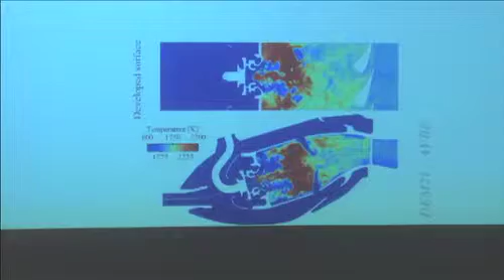One of the simple reasons that you can understand right now is that if the wall is cold, which is normally what it should be, remember we have the exponential minus Ta over T in almost all reaction rates. So at the wall, the flame cannot burn, normally. So that means that you have to think of this interaction as going both ways.

Now, right away, if I tell you that combustion stops at walls, you see that the hydrocarbons, which are able to hide themselves close to the walls or even in crevices, they won't react. They're going to be able to be in a chamber and avoid burning. So these guys, after that, are going to pollute when you release them to the atmosphere.

So there is a link also between the presence of the walls and the presence of the pollutants. In the piston engines, for example, we know that the crevices between the cylinder and the piston are actually a source of pollution, which is quite important.

Now, another thing that walls are doing, and I will show that in a minute, is that walls are actually also acting on the acoustics of the system. If you have a flat wall, an acoustic wave arriving on this wall, it's not the same thing as having a flat wall with holes, because there the acoustic waves are actually going to be damped by the wall, and it's something we use.

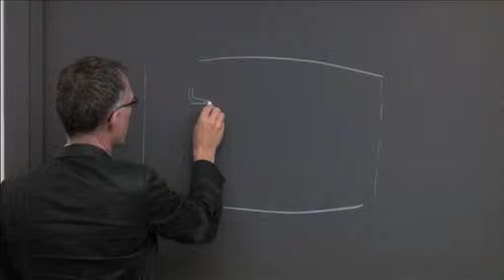For example, in afterburners. Afterburners, you know, are used in fighters, aircraft, to provide more power. So here you have the engine, and here what you do, you inject a lot of kerosene. Again, it's a pretty stupid way to waste kerosene, but you do it.

And here you have flame holders. And so you have an additional flame here, and this is what produces these nice pictures you've all seen. You get a big flame coming out of the engine.

And if you don't put here liners, which are walls with holes, like this one, they are put on the walls here. When this thing gets crazy, again, it has a thermoacoustic wave oscillation, and the way you damp it is by putting walls with holes there. And you can show that it's a classical, again, classical course in acoustics. They act as damping for the acoustic waves.

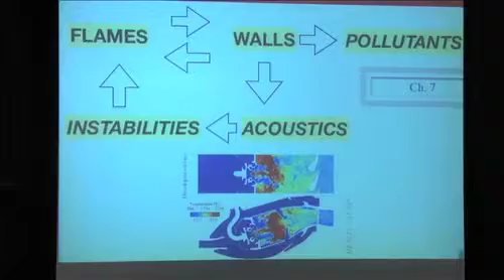So altogether, it means that the walls, again, if you're doing an academic study, you don't care about them. If you want to talk about a real flame, you have to care about walls. So I'm going to be talking about the walls of a combustion chamber, but not only in gas turbines. What I'm going to show today is actually applicable to most chambers.

Okay, if you talk to people in industry, they'll tell you that if you have a combustion chamber, you must burn all the fuel. That's the minimum you can do. You must not pollute too much, and you must not burn walls.

So burning all the fuel is easy normally. You just make the chamber longer. At the end of the day, you will burn everything. Okay, that's simple. Doing that without too much pollution is difficult, but doing all three is something, of course, you cannot avoid.

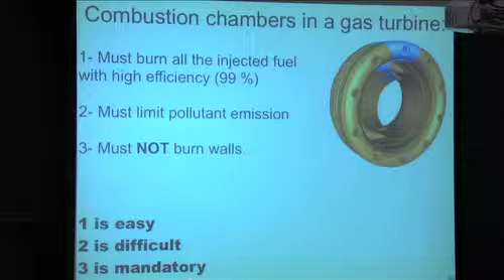Okay, if the chamber burns, it can go anywhere, and you don't want to have this kind of problems or this kind of problems. Every time here, of course, you realize that if you have a 2500K flame touching a wall, it's the end of the day for it.

So which walls are we really talking about? In a combustion chamber, you have a lot of walls. You have first the plenum walls here. Those walls are cooled. They're cold because the air coming in here is cold.

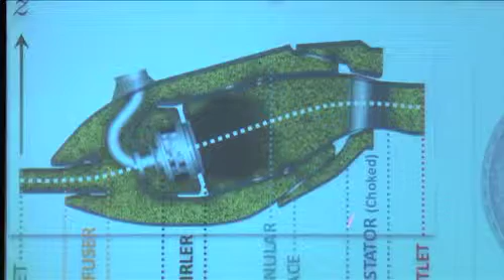Those walls here really see the flame, so they have a hard time. And there's a second type of wall, which is the wall of the high pressure stator, because those walls are facing the hot flow coming directly from the engine.

So in an engine, you basically have two types of cooling problems. You have people who have to care about the turbine, the first stage being the most critical one, the one you need to cool. And then you have people who have to take care of the walls of the combustion chamber itself. Those are not the same technologies.

The first thing you do to protect these vanes is to inject cooling gases. As I said during the introduction, all the question is to be able to mix them fast enough so that when you reach this wall, you have something which is reasonably warm or cold to avoid having problems here.

On these walls here, those are very close to the hot zone, and you cannot do much to help those guys. So what do you do here? You have to use other technologies, and I will show you how this is done.

Typically, the design of all the cooling system in an engine is probably the most important thing that you can have in practice when you design a chamber.

Let me say that during this talk, I will consider that the walls do not burn, should not burn. There are cases where this happens. Normally, if you cool the wall, it should remain cold. If it remains cold, it's not going to burn.

To predict that, it means we are not going to compute only the flow, we're going to also have to compute the temperatures within the wall. So if I take my CFD hat now, as soon as you talk about wall, it's not only CFD for the flow, it's also going to be a computation for the wall temperature.

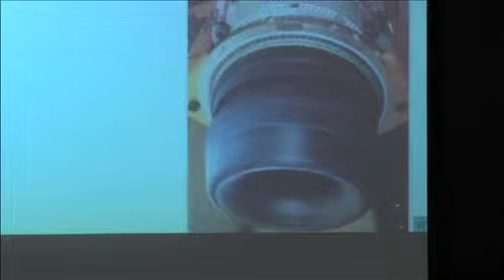If the wall cannot remain cold, the wall is going to burn, and then it's going to die after a certain time. But you do that on purpose on certain engines. For example, rocket engines with carbon-carbon technology, the nozzle is designed so that it burns time after time, and at the end of the propulsion phase, you have lost a lot of mass.

This is not what I want to study here, okay? This is a different problem. Normally our walls should not burn. So what do you do for these walls here? Well, you have to do something.

The thing which is done in most cases is what we call effusion. What is effusion? It's the fact that you're going to drill some small holes here, and through these holes you're going to have some air flowing into the chamber, and this air is protecting the walls.

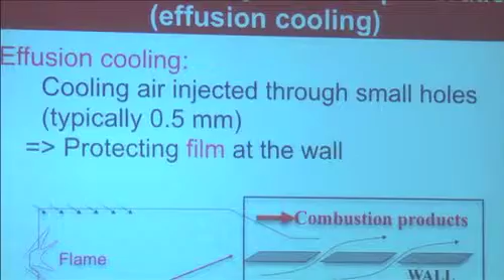Now, you shouldn't say that, but you realize that in an aircraft, when you're flying, your life depends only on a few millimeters of air flowing on the wall. Because if this small film of air goes away, you're dead, okay?

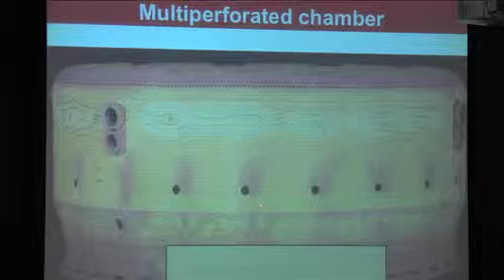The way these holes are drilled really belongs to the secret technology of each manufacturer. This is an example of a Turbomeca engine. You see these holes here, each of them. Today when we do CFD, we are meshing each of them. To give you an idea, there are about 9,000 holes in a chamber like this.

And the angle of the holes, the direction of the holes, and the shape of the holes makes a big difference. For example, Turbomeca a few years ago changed its technology to drill the hole. You don't do it by hand, okay? You have a sophisticated system to do that.

A hole looks like this, but because of the way you build it, you use different technology. One of them is such that at the end you end up with a hole which is like that, with small modifications. So they changed technology a few years ago, and instead of having that, they had a better technology. Better means they had it straight here.

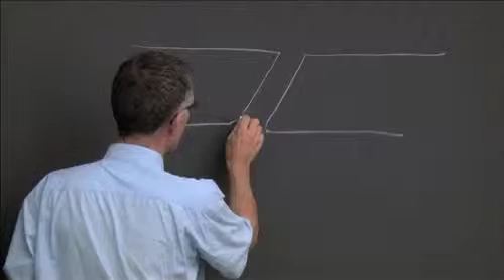Well, the engine did not work. It was burning right away. Because when you do a small change here, as you're going to see in the first simulation, the flow in the hole changes, and it's something else.

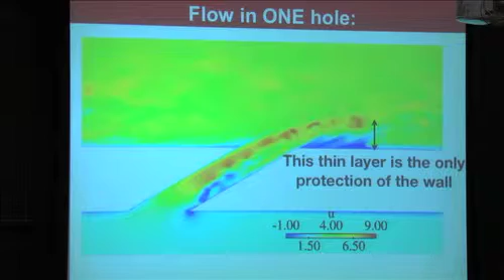Remember, this is the velocity field. If I would show temperature, you would see that this leads to a small film here, and the thickness of this film is what protects the wall. Again, if this film goes away, you're dead. The engine goes away. It always struck me when I saw that - this is sensitive technology. Just a small mistake in the holes, and then you lose the engine.

It's about the same idea for the high-pressure stator, but the holes are not located at the same place. You put the holes where you think you're going to have problems. For the high-pressure stator, you need to compute the temperature in the blades, and I will come back to that in a few minutes.

So it's not only a fluid mechanics problem, as I said. You need to compute also the heat transfer within the blade to know exactly where the hot points are going to be. And as I said, there's a coupling with acoustics, which I will not discuss today - that would be a couple more hours to describe.

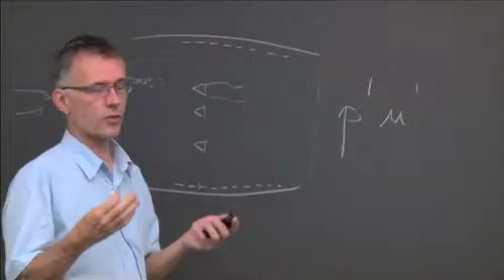How these things act on combustion instabilities - everything I've said yesterday about instabilities, you would have to revise if the walls were multi-perforated, because it would add damping. You remember this term I described yesterday, P prime U prime, as the loss of acoustic energy? I was saying if you have a smooth wall, flat, without holes, U prime is 0. But if you have a wall with holes, this term will not be 0, and you have to redo everything. So I'm not going to do that today.

I'm going to talk about flame wall interaction, give you some general ideas, talk about examples of coupled LES plus heat transfer simulations that we start doing now. It's really recent stuff here.

And then I will also show you an example where wall temperatures are actually changing flames also. It's an ignored factor in many experimental devices - people don't really care about the temperature of the walls, especially when the flame is stabilized. But that's a mistake. We need to care about the temperature very close to the flame holders. And I will not talk about multi-perforated cases because, again, smooth walls are enough to begin for today.

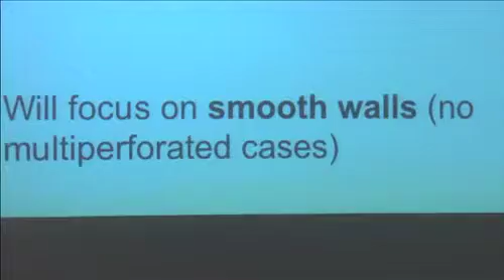So let me start with general features of flame wall interaction. You can have 3 types of events. If you are sitting on a wall in a combustion chamber, you can see different things happening to you. The first thing is that if you're lucky, you are just feeling non-reacting gases which are cold, so that's fine - you have a small heat flux.

Then suddenly you can be surrounded by burnt gases, and that's going to increase the fluxes. But it can be worse than being in burnt gases - you can be touched by a flame front which just burns in front of you. So the flame arrives on you, and that's going to generate the highest flux here.

Typically, to give you a picture, that's what you have in the backward-facing step flow. If you have a flux detector here, either you are in phase 1 where you just have fresh gases in front of you, and that's cool, no problem, or you are in phase 2 where you are in the burnt gases, or you are in phase 3, which is when you are just hit by the flame front. That's the moment where you're going to have very large heat fluxes - when I mean large, I'm talking about megawatts per square meter.

It's not going to last long, but it's going to be hot. You know that the time you remain in the flame is essential. If someone has a candle here, you know you can do that - you cannot stay. If you have a high flux on your finger for a short time, it's okay. If you keep your finger on the candle, of course it's not going to work. So same problem here - it's going to be a problem of heat flux and how long it lasts.

Head-on quenching is the simple case I described before, except I didn't talk about the flux. You take a wall, put premix gases in front of it, ignite it, the flame moves and hits the wall. You can measure the heat flux here, and this is a classical experiment found in many places. People doing piston engines have studied this problem for a long time. This is 1D, so you can do it rather simply.

Then you can have what we call sidewall quenching. The flame is propagating in this direction, and you have a wall here. So I will define the wall distance, which is always the distance between the wall and the flame front. Here it's this distance, and here it will be this distance.

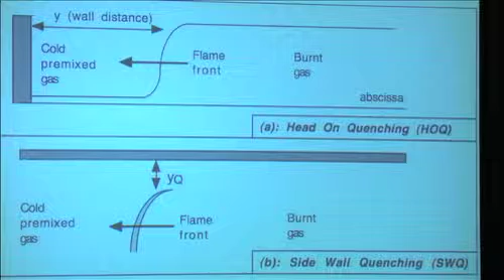If Moshe would be here, I would tell you that you can write theory for that, and that's true. You have a propagating flame with the standard profiles for fuel going down, temperature going this way, heat release going that way. When you go closer to the wall, closer to the moment where the interaction takes place, at some point the flame starts sensing that something is wrong in front of it.

Someone's cold there. So the flame says, well, if something's cold, I may have to decrease my reaction rate, and the flame also sees that there is less fuel left now.

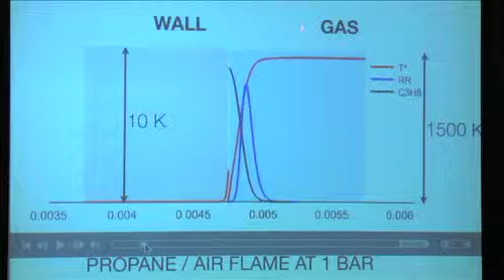When the flame comes here, you see the reaction rate starts decreasing, there is less fuel to burn, and then at that point the flame enters a zone which is cold, and because it's cold, there's no way to burn anything now. So there's quenching, the flame dies.

After the flame is dead, you still have, as I said, unburned fuel here. This unburned fuel is not going to stay here indefinitely. It's going to diffuse very slowly, but it's not burning anymore. And of course, this high point of temperature is never going to hit the wall. It's not able to go there because it's not burning anymore.

And then you have a funny behavior after that. If you track, for example, the point of heat release, it's going to go backwards and down at the same time. So at that point, defining where the flame is becomes kind of difficult. If you go later in time, you end up with a little bit of fuel left and a profile of temperature which is now purely diffusive.

And if you wait long enough, you see that in the wall, we are left with a big peak of temperature which diffuses slowly into the wall. So this is an example where the wall temperature does not change much. Of course, if you keep sending flames like this onto the wall at 5,000 hertz, after a while the wall is going to feel it.

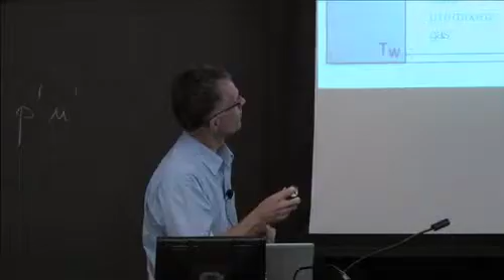You've seen, well, Moshe talked about it yesterday, you can do theories for non-adiabatic flames. You can prove that when you take a flame and take out about 1/3 of its power, it's too much usually for the flame, and the flame dies, and that's what's happening here. You are cooling the flame too much, it dies completely, and there is no flame left.

Now what you can do, we can do a lot of simulations and measurements, and there's a very interesting and very simple scaling that you can use here. You can plot the maximum flux in the wall versus the flame power. Flame power is simply the amount of power that you are producing per square meter of flame. So it's rho Cp delta T, or rho delta H if you prefer, multiplied by the flame speed. This is the amount of energy which is released.

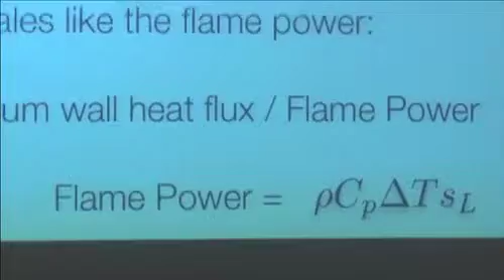There's a very interesting scaling here: for most hydrocarbon flames, it's about 1/3, and again it's very close to the 1/3 that Moshe discussed yesterday. That means when the flame dies, it releases about 1/3 of its power to the wall, and then it's gone. So if you have a flame in a box, and someone asks you what's the maximum flux you can have on the wall, it's very simple. You compute the flame power, multiply by 1/3, and you can tell this person how much power to expect on the wall. That's a very useful scaling law.

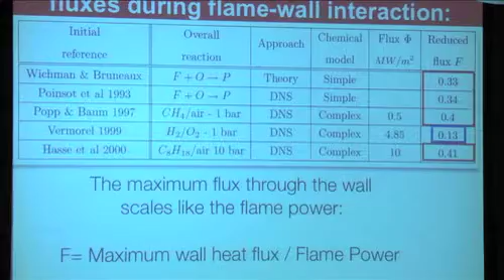There's one exception for hydrogen. Hydrogen is a bit different, but again, it's because hydrogen is so powerful. The ratio seems to be more like 10 to 15%. We have tested this relation on many cases and it works almost all the time. So that's one you can remember easily, an easy way to scale the flux here.

The second thing you can do is look at the minimum distance between the flame and the wall. You see the flame never touches the wall, and it stops at a distance which we call Y, YQ for quenching, that you can scale by the flame thickness. Again, remember that this is not a real thickness, Moshe said it also yesterday, that's just an estimate of the flame thickness. The flame is about 3 to 4 times larger.

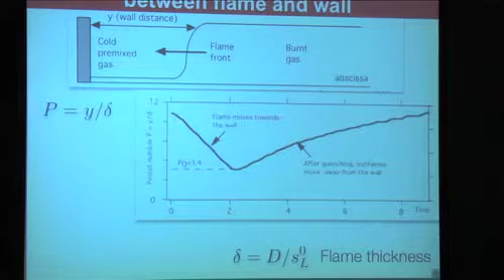So in practice, when we say that the YQ here is equal to 3.4, that means the ratio of the distance to the flame thickness. In the real world, that means the flame stops approximately at 1 flame thickness from the wall. Again, that's an easy scaling for you. If you compute this number and multiply it by 3.4, you have the distance at which the flame will stop from the wall, of the order of 3.4. So that means a flame will stop at approximately this distance.

Now, we talk about sidewall interaction.

No, just a minute. I forgot to talk about unburned fuel. If the wall is cold, you will have some hydrocarbon left, and as I said before, this will lead to pollution later. So let's go to sidewall interaction.

Now the flame is propagating in this direction. When you do measurements or simulations of that, you find this leads to smaller fluxes. Instead of 0.3, you have about 0.15, and to larger minimum flame wall distances. The distance from this point to that point is about 7 times the reference flame thickness. And then this flame can move, no problem.

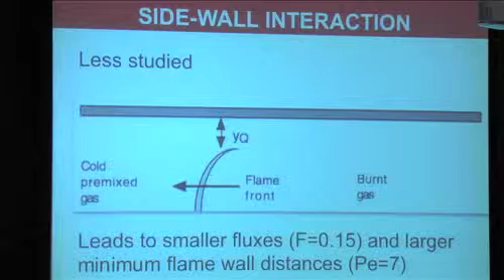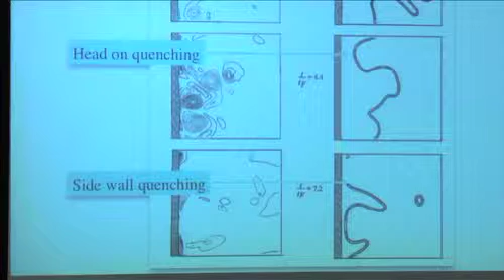When you do a turbulent flow, you have both sidewall and head-on quenching. For example, here these are different times. You see here the heat release. You see this point is going to hit the wall at a normal angle, so this is initially a head-on quenching. But once it is quenched, this point will move down here. This will be a sidewall quenching. So you can do all kinds of statistics on that, and we did before. But I want to talk here about another interesting case.

We see the tube wall quenching. Instead of having one wall, you put two walls, one on each side. In this case, you see that if the distance between the two walls is too small, then the flame will completely quench. This was discovered about 100 years ago when people tried to compare their flame speeds.

They found that the flame speed they were measuring by propagating a flame in a tube were different. So they started asking themselves why it was different, and began changing the size of the tube. Very rapidly they found that indeed the flame speed in a tube depends on the size of the tube. If the tube is too big, you have instabilities, you will never measure anything. But if the tube is too small, the flame speed goes to zero.

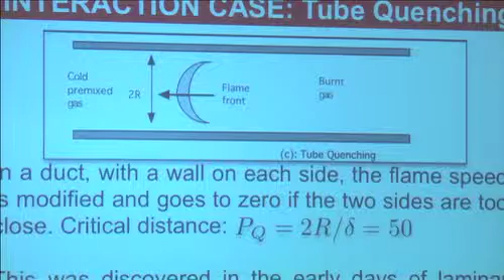The size of the tube at which you get quenching is typically 50. That means if this duct is 50 times the flame thickness, the flame cannot go through it. Typical flame thickness is of the order of 0.1 millimeter, so if you have a tube a few millimeters wide, the flame will stop here.

They did measurement of that. That's an old book by Lewis and von Elbe, where they give you the tube diameter necessary to stop a flame front. You see it depends on the equivalence ratio. Typically here you have 1 centimeter, 0.2 centimeter. If the flame is fast, of course, then you have to have a smaller tube.

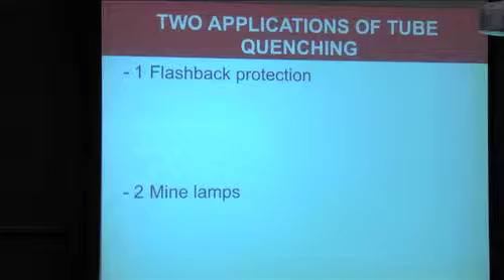Interestingly, this small statement about flame wall interaction is the source of a lot of things. It's probably the source of climate change today. It's the reason why we are sitting in this room, because we are producing all this energy, coming back to the beginning of the century, where people actually used this device to be able to get coal. I will explain that in a few minutes by the example of mine lamps.

The other application I want to mention is flashback protection. Flashback protection is this idea that if you use a premix flame located here, you are afraid of seeing this flame flash back, exactly what I mentioned for engines. One way to protect the flame from flashback is to have here a grid with holes, small holes which are actually smaller than the quenching diameter, so that if the flame hits this wall, it will actually stop there.

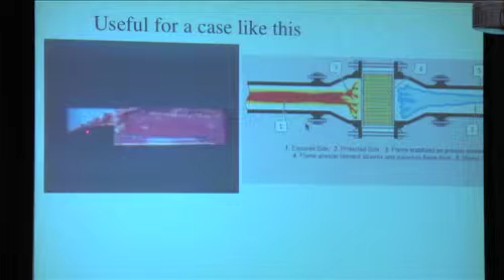So this is typically the application which would correspond to that. You've seen it already many times. If you would have a grid here, and the flame would hit it, then flashback would not occur. You can actually buy what we call a flame arrestor on the market that you can install on your system. And if you're doing a PhD on premix flames, you should buy one.

Now, don't do like me. When I was doing my PhD, I had a nice flame arrestor here. The important thing is that it works only once, because if the flame flashes back and hits the wall, usually the wall burns. The flame dies, but the wall burns, so you get a big hole. So the second time, it won't work. You have to be careful if you're using a flame arrestor, check it's still there after the first flashback.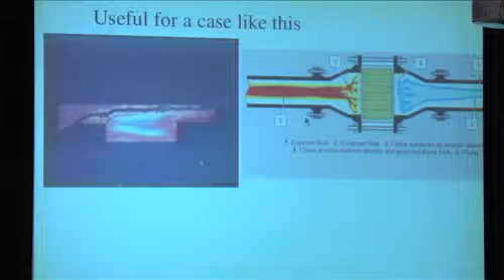Okay, let me go now to the mine lamp. That's a very interesting story. The guy who found the mine lamp was Davy. He was a lord in England. And this guy took a patent first, then he wrote papers.

The idea basically is the following. He said, if I put a lamp on the head of a guy going into a mine, and if there is gas in the mine, usually methane is produced around coal. You don't have only coal, you also have combustible gases. Then this lamp with the flame here, no electricity at that time, this lamp will ignite the gases, and that will be a big problem. We're going to kill a lot of people.

So we need a method to have a lamp here without danger. The method is simple. You use a grid with holes, each hole smaller than 50 microns. This way the light can get out, but not the flame. It's a very smart idea. So the lamp was looking like this. You would ignite here, and there would be light coming out. But if you had surrounding gases which are combustible, the flame would not be able to get out.

And that was a major revolution at that time, because that allowed people to go dig into these mines with light and without too many accidents. When I say too many, you're going to see too many still means a lot.

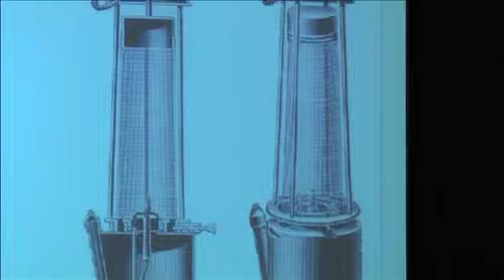Interestingly, I said also that yesterday, if you have an idea, you are sure someone else got the same idea at the same time. Stephenson here, also in England, was not a lord. He had the same idea at the same time. And there was a big fight between these two guys, because Davy was convinced that Stephenson stole the idea from him, and there was a vicious fight between the two. But actually, I believe that, like always, if you have a good idea, someone else has the same at some point, usually at the same time.

So Davy, actually, because he was the Lord, won the fight, it makes sense also. So he got all the credit, but actually it seems like Stephenson got the same idea. So I want to use that to give you an example of what combustion science can do for you.

And it's a true story, okay? You're not going to believe it, it's true. So in the 19th century, when you started digging in mines, you dig the coal here, and then you produce usually CH4, some kind of gas like this, methane. When you have a lot of CH4 in the place where you are digging, and someone else does something stupid, like igniting a spark or something, you get an explosion, okay?

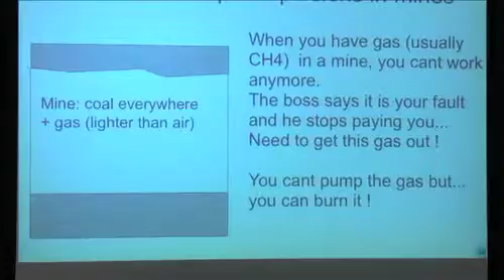And if you get an explosion, you kill a lot of people. That's, I don't know how many people have been killed in the world. I will give you statistics in a moment, but that's amazing. And people are not aware of that. Even today, you get people killed by thousands every year in mines.

So the problem you have here is that if you have combustible gas here, usually you have to stop working. And in the old days, the boss — that was a nice time to be a boss — he said usually it was your fault. The reason why you had methane going out is because you were not digging the coal in the right way. So he would stop paying you, and nothing would work until you pump the gas out.

So how can you pump the gas out of this thing? You didn't have pumps anyway. So one solution is to burn it.

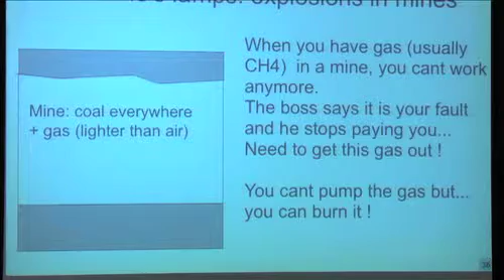There are two ways to burn gas in a mine shaft like that. You can ignite it by accident, in which case you have an explosion. These explosions over the last centuries have killed a lot of people, and if you look, especially now in China, you're going to see a lot of people getting killed every year. I've heard numbers between hundreds and thousands.

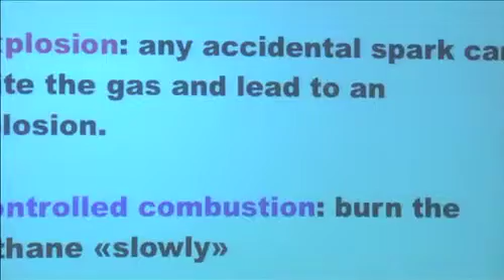So there's a second solution, and that's the smart one. You can burn the methane here slowly. How do you do that?

Well, if you wait long enough, you get everyone out of the mine, the light gases are going to go up, and the fresh gases are going to be in the lower part of the mine. In other words, you will have something which looks really much like what we described when we talk about laminar diffusion flames. You will have gaseous fuel on one side, and air on the other.

So you can say, oh, that's a good thing, I could burn them in a diffusion mode. If I can start a diffusion flame, diffusion flame being extremely lazy and slow, if I start a flame here, it will burn very slowly by diffusion, and it will consume all the gas here.

There's a small problem. You need to ignite it, okay? You remember we talked about the triple flames, which are needed to go from a mixing state like you have here to a diffusion flame.

So how do you ignite it? Well, it's simple. First thing, you take the youngest guy, and then you give him a Davy lamp, and you say you got something to do in the mine, so you don't give him too many details. And...

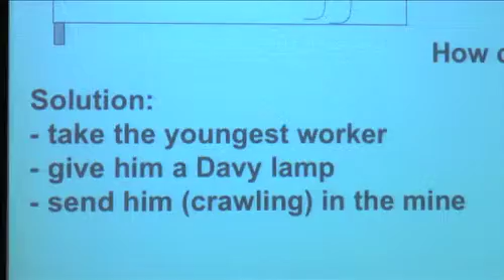And the guy crawls on the ground. The reason why he needs to crawl is because this is the place where you get the smallest amount of gas, okay? You get air here.

And once he's at the place where people know that there is some gas, you tell him to remove the grid from the Davy lamp and just raise your hand, okay? So you raise your hand here. When you reach this zone, where you reach, you know that because you are combustion guys, when you reach the stoichiometric line, combustion will start.

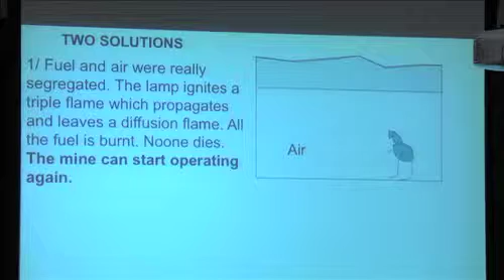So now there are two solutions there. The first solution is that when the guy does that, the fuel and the air were really segregated. You were really in a diffusion mode flame. And in that case, when you reach the point where the guy ignites here, you will have triple flames propagating all over the zone. It will make like a nice sheet of flame above his head. And if you wait long enough, by diffusion, you will actually consume most of the fuel there.

And then you can start working again. That's the good solution. The second solution is that everyone went out too fast. There's a lot of mixing there. And so instead of having a diffusion mode, you're going to have a premixed mode. Now, of course, if you start a premixed flame there, you might go to detonation. Probably the guy will die, but the mine can start operating again. So in both cases, it works.

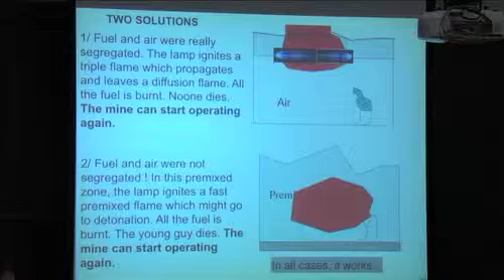Okay? And it's not a joke, okay? People were doing that. I could not believe it. But so it's an example where you see how you can use combustion science for practical applications here. And of course, you need the Davy lamp, you need the triple flames, you need everything together to understand how this thing is working. So today it's obvious. In those days, it was kind of magical.

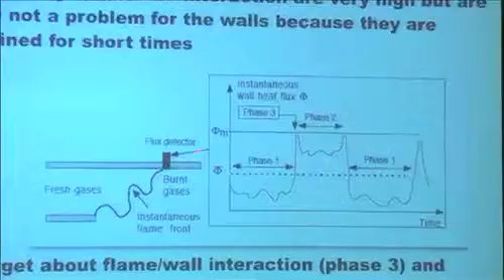So let me go back to normal cases now where you have no explosion, and I want to come back to walls and flames. So when you look at the temperature field on a point like this, what you realize very rapidly is that at the moments where we have this flame/wall interaction, you have a very large heat flux, but it doesn't last long. So normally, if you're an engineer who cares about the temperature of the wall, you can forget about this phase number 3. What's important is when you are submitted to the burnt gases, even if there is no flame. So we can concentrate on that, and that's what I'm going to do now.

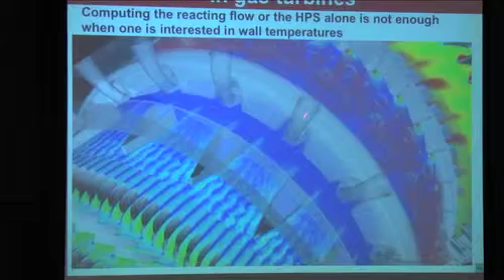So here, I just want to remind you of how a jet engine looks like, so that you realize we're talking about a complex animal here. This is a movie done by CTR, Stanford, where you have here the compressor. Here you have the injection of kerosene. You're going to go into the combustion chamber. You can see here the high pressure stator.

That's the guy I'm going to be talking about now. This guy here is going to receive the hot gases coming from the combustion chamber. And since he's the first, he's the one who gets the largest heat fluxes. Okay? So this is really the one where we need to care about the temperature and the flux.

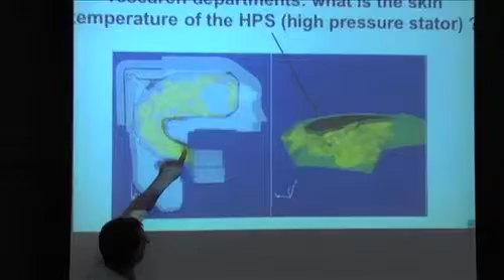If you're working for a gas turbine company, in the turbine department, you are going to be looking at this animal here and wondering, is it going to survive or not? Interestingly, it seems obvious for us but not for turbine people, that you need to couple the computation of this with the computation of the combustion chamber, because it's really the combustion chamber which produces the temperature reaching the turbine.

It's not clear at all when you go to a company that it's happening this way, because the guys doing the combustion chamber are in one department, and the guys computing the turbine are in another department, and they compete for the same money. So the turbine guys keep saying, well, you don't need information from the combustion chamber, we'll just use 1800K and that'll do the job.

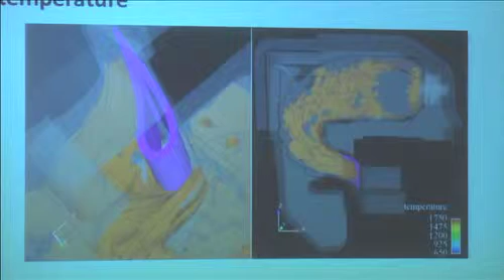Of course, when you look at animations like this one, you see right away that you cannot hope to get the temperature right here, in this blade, if you don't know what the signal is, what the input is, especially here, what the flux is. So you need to couple the combustion chamber computation and the turbine computation.

When you do that, I'll talk about that in a second. You may have to think also about radiation. Yesterday I started talking about that. You will see that radiation can become important.

Coupling now. Coupling is not something which is done usually in laboratories. Normally in laboratories you try not to care too much about coupling, but here you have to.

The way it's done in many labs and many companies is that people would take the mean temperature and velocity at the outlet of the combustor and give it as the inlet condition for the turbine when they are sophisticated. That's the maximum they do, and that's what we call the weak coupling. The strong coupling would be to couple everything, not only the mean values.

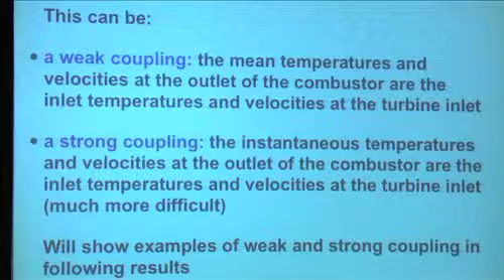Again, you've seen that the mean values are usually not a good idea, but you also need to couple the perturbations in time, which will be much more difficult. So I will show you some examples of that.

Again, you cannot do that if you don't use a very powerful LES solver that can compute on a lot of processors. Let me say also that if you do the computation with RANS, you can do it today - a code like Fluent already incorporates dual computation of heat transfer and flow. The only trick is that they do it with RANS, and as always, that's a big limitation.

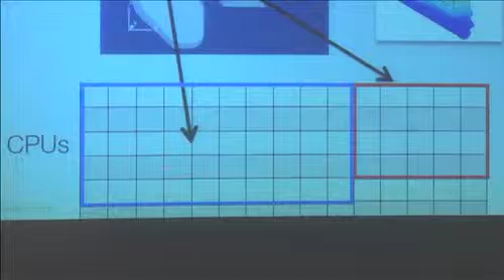I talked about parallel computing yesterday. If you want to do that now, you have an additional problem: if you have a machine with 10,000 processors, you need to say that the flow is going to be computed on maybe 9,000 of them, and the heat transfer is going to be coupled on 1,000 processors. You need to make these two codes work together on the same machine.

So again, in terms of computer science, it's a big problem. The HPC community has been focusing on how do we couple one code, how do we parallelize one code. But that's not what we need for industry. For industry, it's not about one code - it's multiple codes on the same machine, all working together. That's a big problem for computer science.

Okay, let's talk about precision now. Can we forget, for example, about radiation? If you solve a problem like this, you have to ask people in industry, what's the precision you expect, what is the precision you need? You shouldn't ask them, because when they give you the answer, you're afraid of the answer.

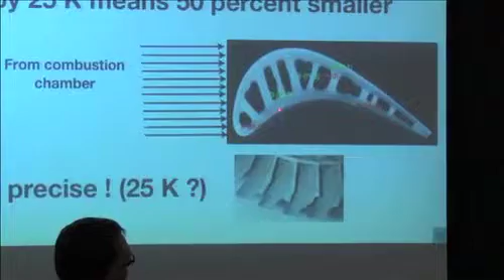The answer is, people will tell you, this is a blade, for example, for a gas turbine - if you get the temperature wrong by 25K, it's half the lifetime of the engine. Which is crazy, because these guys hope that we will give them the temperature of the skin here with a precision of 25K, when, as you know, we don't even know the adiabatic flame temperature to within 25K. I shouldn't tell them that, but the truth is that 25K is extremely small for a combustion guy. It's very difficult to imagine that we can do that.

Now you have to realize how they do it today. You give them a temperature accurate to 25K and they add 100 to be sure, okay, for safety.

As they try to reduce safety margins, engineers start wondering, are you really giving us 25K? And if you don't give the 25K, this is what happens: you're losing pieces of the blades, which is not good.

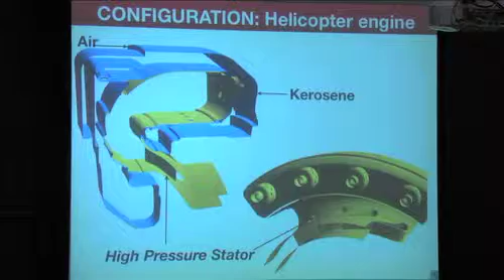I'm going to show you a computation of one of these turbomeca engines where we coupled all these things. This is the geometry you've seen before: air inlet, kerosene, outlet. We're going to look at the high pressure stator, which is the most

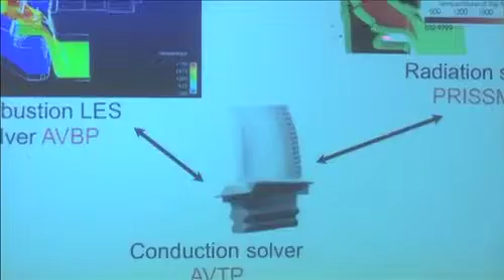difficult place in the engine in terms of temperature and lifetime. If you do that, you're going to have to couple now not 2 but 3 codes. You need a code for LES in the fluid with combustion, then you need to compute the temperature within the blade with another code,

and you need a third code to compute radiation. Since we're talking about 25K, which is a very small number, it's logical to say maybe we need to add radiation there. If you want to be precise by 25K, probably it's a good idea. Now it's not only 2 codes you need to couple, you need 3 codes.

If some of you have to do that, I recommend you take a look at a code called OpenPalm. It's an open source coupling tool which does the job of taking 3 or 4 codes and running all of them together on a parallel machine. Believe me, if you need to do it on your own, you should start with a code like this instead of trying to do it yourself.

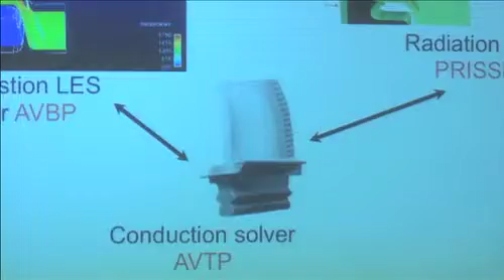For example, you could have the idea to make this a subroutine of that code, and that a subroutine of another, and try to merge them. Believe me, it's not going to work. It's much better to leave them running independently and couple them with a strategy like that.

But again, we're talking here about computer science. It's not really what I wanted to do today, so I'm going to jump to the results.

This is typically what you find when you compute the temperature in this system in an uncoupled way. The high pressure stator here is impinged by the hot zone. This is the temperature field, and you can see how these hot points are impinging on the blade.

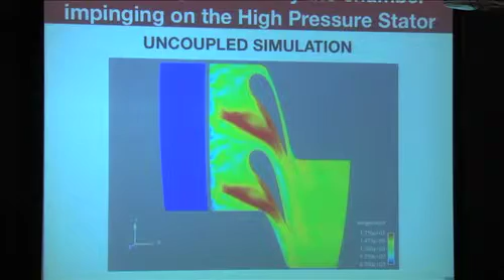I'm going to show you two simulations. One is what I'll call the two-code simulation, where we only couple the combustion and the conduction in the high pressure stator. In the next one, the three-code simulation, I'll add radiation to see what the difference is.

I will not give you the details of the inside cooling of the blade. This is not the actual blade we use, all these things are secret. This is the kind of technology which is crucial, so we will not see the real blade.

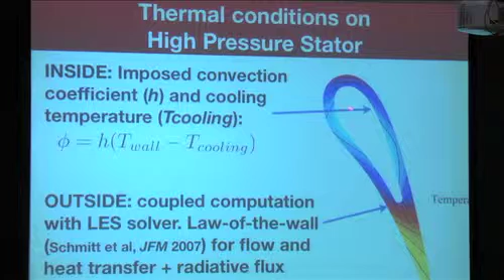The blade inside has a very particular pattern for cooling, so we replace the real blade by one where we say inside the blade there's a convection coefficient and a cooling temperature imposed on this surface. On the other side of the blade we explicitly compute the heat transfer and flow using a law of the wall which I described yesterday.

So let's talk about radiation now. Radiation is really produced in the very hot places in this flow, it goes like T to the power 4. So here, there will be almost no radiation.

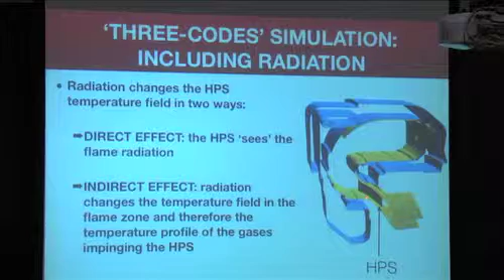All the radiation will be produced by this zone. For the high pressure stator in this engine, it's not general: the high pressure stator does not see this zone, and light doesn't take turns. So there's no way this point can be influenced by direct radiation from that point, so the direct effect is almost zero here.

It's not much because this is not a sooting flame. It's a blue flame, and the radiation level isn't that high, but it would still mean 50K less on average for outlet temperatures here, which is a lot compared to the 25K these guys are expecting from us.

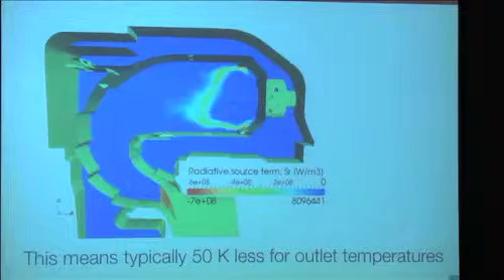So we computed the radiation fluxes on the walls. This is the radiation flux on the wall, and as expected, the direct radiation flux is zero on the high pressure stator. It's not zero on the walls of the chamber here, but that's an indirect effect, and that's the one we're going to measure now.

This is the result you obtain when you plot the temperature in the blade starting from this point here, 1, 2, 3, 4, 5, etc., going back. These are the points indicated here. You see that the temperature in the blade, again we cannot give numbers, is about 200K here. You see the computation without radiation and the computation with radiation.

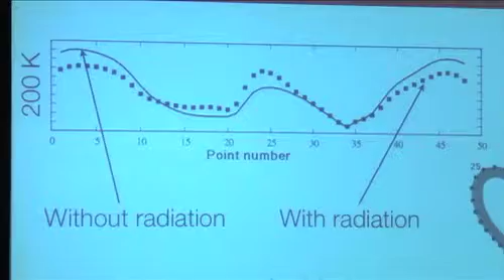You see that radiation does things that are not intuitive. It's not always true that radiation decreases temperatures. On the skin of the blade, at some points you get lower temperature with radiation, but at other points you get higher temperatures, just because things have mixed differently in the primary zone of the combustion chamber. So if you want a precision of 25K, you have to add radiation. That's a pain again, because radiation, as I said, is very expensive.

Okay, this is not the only issue here. We talk about flame wall interaction. I want to finish by showing the effect not only of the flame on the walls, but the effect of the walls on the flame. And I want to do that again in the framework of combustion instabilities, since this is what we discussed yesterday.

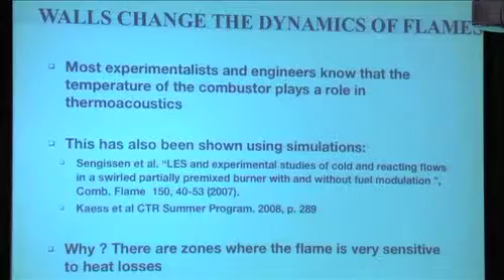So we've seen that walls change the dynamics of the flame. If you're doing an experiment, you probably know that when you start, you have a certain flame. If you wait and the temperature rises, at some point you might have another flame. We know from simulations and experiments that some flames are very sensitive to the temperature of the walls. One example is this one.

So the link between heat transfer, the walls, and instability is an open issue. We don't really know if it's important or not. A lot of people in this room probably do experiments on flames, and if I ask them the temperature of the walls, they'll say 'I don't know, I just know they don't burn.' But it could be between 100K and 500K, I have no idea.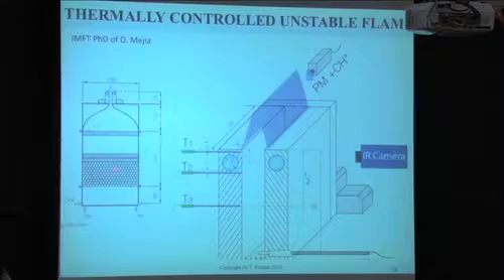So let me give you an example of a setup we have in Toulouse. It's a very simple flame. You have a flow here which is laminarized going through a convergent nozzle, and at the end we have a big slot where the flame is stabilized, which has this shape. We're going to look at this flame from the side to see its shape.

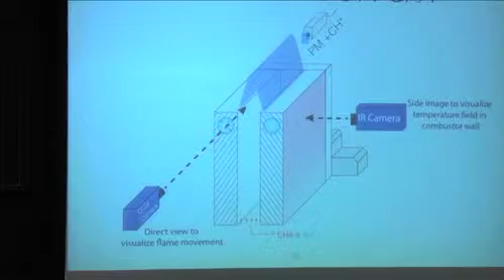We're going to look at the temperature of the walls, because we're going to cool these walls on purpose. We can control the wall temperature using an infrared camera, and we also cool the walls by adding water flowing through them, to monitor the temperature. So we'll be looking at the flame movement, the temperature of the wall, and also the emission. The cooling system is such that we can switch it on or off.

Okay, so this is what you're going to see in the movie here. This is a direct view of the flame. The flow is premixed entering the system like this, so it's a classical Bunsen flame. Here, the thermography picture is the picture of the side of the wall. And here you have the fluctuation of heat release, which measures really the instabilities.

You will see that when we start the flame, this will be time here. It will be speeded up after a while because it takes too long. Initially, the flame will be unstable. Then the walls will get warmer, and the instability will go down. Then we'll start the cooling system, and you will see the instability will go up because the walls will be cooler again. So let me just get this thing working.

Then we ignite the flame here. I think you understand it's noisy. So for the moment, these walls are cool. Now we're going faster, 40 times.

You can see that when the walls are heating, the intensity of the fluctuation is going down. Actually, at the end here, the wall will be very warm, the flame will be almost stable. You don't see any modification now. It's almost stable here, and now we start the cooling again.

So we are cooling the walls, so you can see temperature going down again. And you see the fluctuations are going up again, you see the flame fluctuating again. So it really proves that in a system like this, there is a direct link between wall temperature and instability. Okay, now it will be almost back to the initial state.

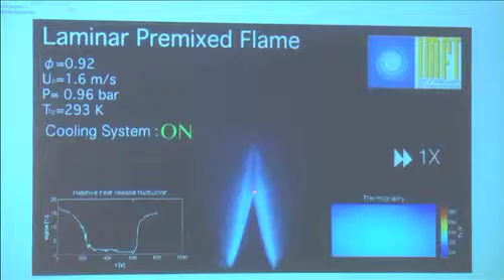Again, in most models for thermoacoustics, people don't even care about the temperature of the wall. It's not a parameter that is in your model. So this shows that it has to be there. You can plot the pressure level as a function of time, which means actually as a function of temperature. And when you start the cooling back, you see that it's going unstable again.

So we studied this phenomenon on a simpler flame, not that one, another one, which is indicated here. This is a multiple hole flame. Every time here you are injecting gases, and we are going to pulsate this flame to look at the flame transfer function. Again, I've shown that yesterday.

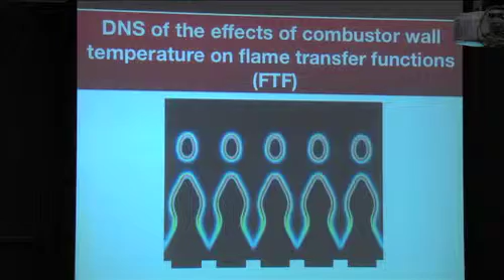If you want to study the stability of a flame, it's a good idea to start by looking at the response of this flame to acoustic excitations. So we're going to pulsate flames, and we're going to see how the pulsation is changed when we change the temperature here of the flame holder.

So I'm not going to re-describe again what the combustion instabilities are. You have seen that yesterday. You have seen also what the principle is for flame transfer function. We are going to send acoustic waves there and look at the response of the flame.

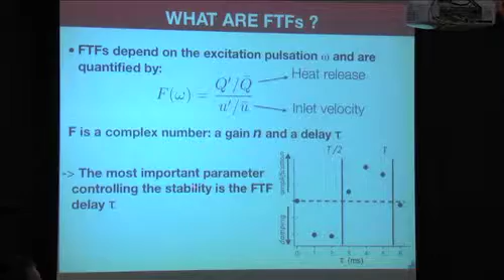One of the things which must be said about this business is that we need to talk a little bit about quantification of uncertainties. When you plot diagrams like this one, which is a typical diagram for combustion instabilities, you end up saying that you have a domain where when the time delay is such that it's between 0 and this value, it's safe, meaning you are stable. And if it's between this value and this value, it's dangerous.

So you go to industry again, and the guys tell you, well, okay, where is my time delay now? Time delay is here for your burner. And the guy says, are you sure it's here? Could it be here? And you tell him, well, I don't know. I don't know actually how uncertain my prediction is. And it's very important to be able to quantify in this system the exact uncertainty that you have on your prediction, because of course it's a 0 or 1 problem here.

Either it's stable or it's unstable. So if you say it's stable and it's unstable, then you're in bad shape. So it's important to quantify not only the delay, but to know the precision of the prediction. That's also a very new field. Quantification of uncertainties is only arriving in the field of combustion, but I'm sure that you will have to face that in the years to come, because people now don't want just an answer.

They want an answer and a safety margin. Like you listen to the weather, they tell you tomorrow it's going to be nice, and the confidence index is 3, 4, or 5, or something like this. You want to know that before you make a decision on your weekend.

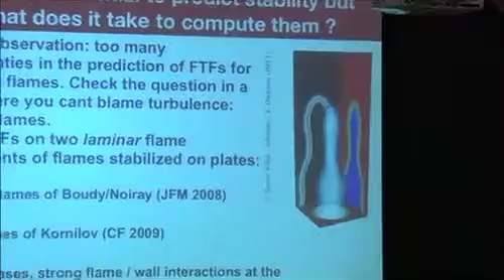So we're going to look at two flames, which are both laminar. One of the reasons why we came back to laminar flames is that we were computing turbulent flames, and as always, turbulent flames are so complicated that if it doesn't work, you don't know why. So we went back to laminar flames.

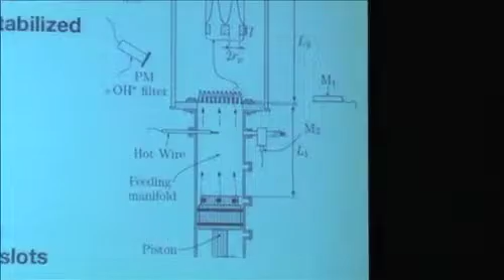One of them is a flame coming from École Centrale. The other one is the flame of Kornilov. In both cases, you have measurements, and you will see that the temperature of the flame holder plays a big role. This is the flame of Boudy here, with 49 small holes on the plate, so 49 small flames like this. And the flame of Kornilov is only 8 premixed flames located like this.

And they are both laminar, and we are pulsating them. So the first thing you do is compute the mean flame. So you have here the mean. This is the DNS computation, and this is the experiment. You see the mean flames are very close.

Same thing for Kornilov. The thing you see also for a flame like that, and this one is the same, is that these flames don't touch the wall. There's always a distance between the foot of the flame and the wall, because the wall is cold, not always at the same temperature, but cold enough so that the flame cannot go there.

It's easy to see why. If the flame would go here, the temperature here would be 2000 K. The wall would be gone. So there's always a difference between the place where the flame starts and the plane here of injection of the gases. And this zone is important. People have tried to ignore it for a long time, but it's important.

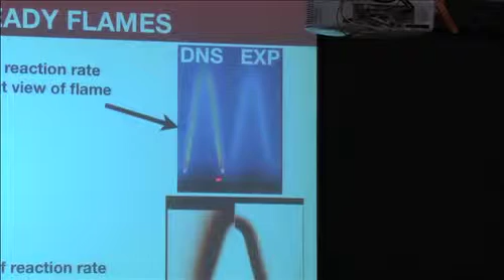I'm going to show you in simulation here for the Boudy case, where we're going to have two cases. One of them will have a cold wall here, and the other one will have an adiabatic wall. The adiabatic wall is on the left here, and you see the flame starts right away at the bottom of the injection, and here the wall is cold.

And we are pulsating these passages. You see that when you're pulsating the adiabatic case, you have one response, and when you're pulsating the other one, you have another one, because here the foot of the flame is moving also up and down. The response of these two flames are quite different, which tells you that if you want to measure a flame transfer function, you need to care about the temperature at the foot of this flame. You cannot ignore that. You cannot say, I don't care about the temperature.

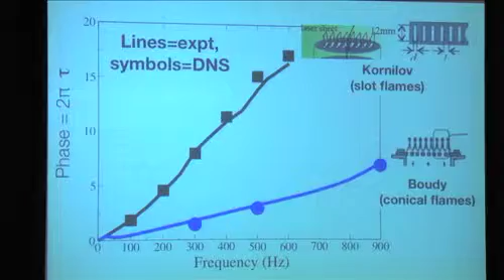You have to worry about that. Then, of course, you can match. This is the phase of the flame transfer function. That's what I keep saying to my students. If this is typically the experimental results, the lines, and the symbols are the DNS. Normally, it's always possible to match, because you have enough free parameters in your DNS, and this is what we did. What this shows only is that you have enough free parameters, for example, the temperature here at the base of the flame, to recover what you see in the experiment. But if you would like to predict it, then you would be in trouble.

So what we did is a first-order quantification of uncertainty on this system to see what's important. For example, when you do DNS like this, you have some free parameters that the PhD student knows about and the advisor tries to ignore. You need to fix a temperature for this wall, a temperature for that, you need to choose a flame speed, and you need also to choose an inlet temperature.

Here I won't talk about flow expansion, but it's the same problem. All these parameters are more or less free. And what the PhD student is doing is tuning all of them until he gets the result that the advisor likes, basically this curve, okay? It's not something we should do. It's a bad idea.

So what we did is to try to be honest about it, and we did a sensitivity analysis. How do you do a sensitivity analysis? You take one flame speed, multiply it by 1.1, by 0.9, redo the simulation, and you look at the sensitivity of the results.

This is a map of the sensitivity of the results, and you see that the results in terms of flame transfer delay tau are very sensitive to certain parameters and less sensitive to others. I'm not going to go into all the details here, but this is a summary of the results. Basically, this is the sensitivity. You see you have very large sensitivity to the flame speed - that's the first order parameter.

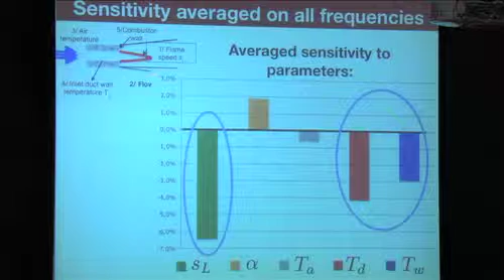And you have a very large sensitivity to the temperature here of this duct. That means if you get this temperature wrong, you get the flame transfer function wrong. The other parameters are less important. So if you're doing a computation of this system, you have to worry about temperature here and there, about flame speed. The temperature of the air here is not going to be a problem, and the angle of expansion is not. So you can forget a lot of things, but you have to care about these, and of course, these things control the result.

So if you don't know them, you can adjust them to find the right result. But it's not honest. The honest thing to do is to try to find them. The problem is that finding them, if you want the model for the flame speed, you need good kinetics. And we are back to step one, which is we don't know the kinetics to the level where we can say this is the flame speed with a precision of 1%. We just cannot do that. So we have a problem.

And if you want to have the wall temperature here, you need to compute the temperature of the walls, which we didn't do at that point. So that means you really need to couple your computation of the flow with the computation of the wall. It's a bad conclusion for people doing PhDs in labs, because it means you cannot just do a simple code to compute the flame and expect that you're going to have reasonable results.

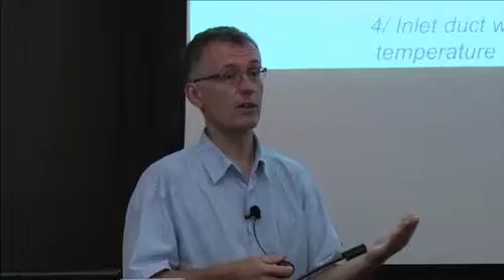You're going to be able to tune them, that's for sure. But if you want to predict - typically, if you want to work in a blind test mode, I give you the geometry, I don't give you the results, you do the computation, come back to me in 6 months, and I will tell you what you should have found - then you'll be in trouble. You're not doing a predictive computation. That's really an important thing that's going to develop in the future.

It's also a discussion we had yesterday with the other teachers here, that there's this trend when you write a paper that more and more, if the experimental results don't match the simulation, you don't want to publish them, or you're afraid that you're going to be refused when you publish results. I think it has to change. People have to be able to produce results saying it does not work. I didn't tune anything, it does not work. Maybe I could have tuned a lot of things and made it work, but that's not the idea. The idea is that we should really show results honestly, and if they don't work, it's fine.

Of course, it's difficult to have a paper accepted when the conclusion is it doesn't work. But I think we have to change the way we do that, because the funny thing today is that it's always working - you read all the papers and at the end the guy says it's working. But then you apply it to another case and it's not working anymore, and we all know that. So we should be more honest in the way we handle papers.

So to conclude on this wall temperature business: the interaction between the flames and the wall cannot be ignored. You can compute it, it's a little bit difficult, you need to couple codes, and it's changing a lot of things. Probably you should think about this kind of conjugate heat transfer flame simulation if you're looking at problems like this one.